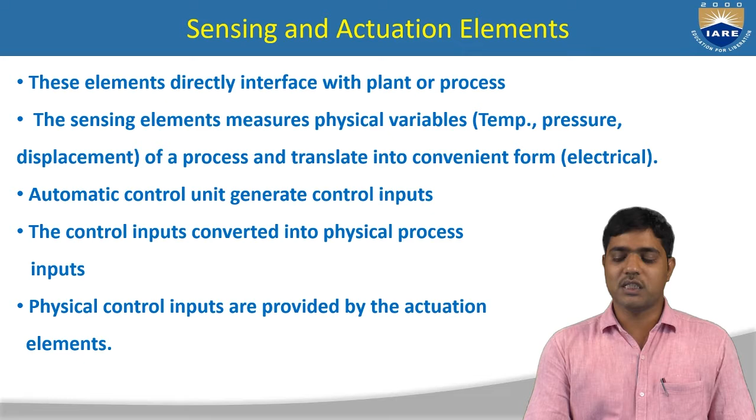If you look at the typical sensor system, these sensors are composed of a set of typical functional elements, connected in a specified way to provide a signal in the necessary form. In this typical sensor system, you have the medium, sensing element, signal conditioning element, signal processing element, and signal handling element. So what do you mean by a medium? Medium means it is a physical process where some phenomenon takes place.

Suppose you take a boiler; there you observe what pressure or temperature takes place because of some chemical reaction or any other reactions. So there may be a change in the physical variables within the process or plant. That is what we call the medium. Now these sensing elements sense this particular physical phenomenon.

So because of the physical phenomena, there may be a change in the physical variables, like if we are taking the temperature. So because of some physical phenomena, there will be an increase or decrease in the temperature. That particular temperature you are going to sense through the sensing elements. So here these sensing elements are going to interact with the physical medium, either directly or indirectly.

Suppose we take the example of thermocouples. So what is the principle of thermocouples? If you are going to measure the temperature with the help of thermocouples, one side of the junction points interacts with the medium directly, and on the other side there will be a change in the voltage. Because of the heat changing at the junction, because of the medium's physical phenomena, there will be a change in the voltage at the other end of the thermocouple. So the thermocouples directly interact with the medium.

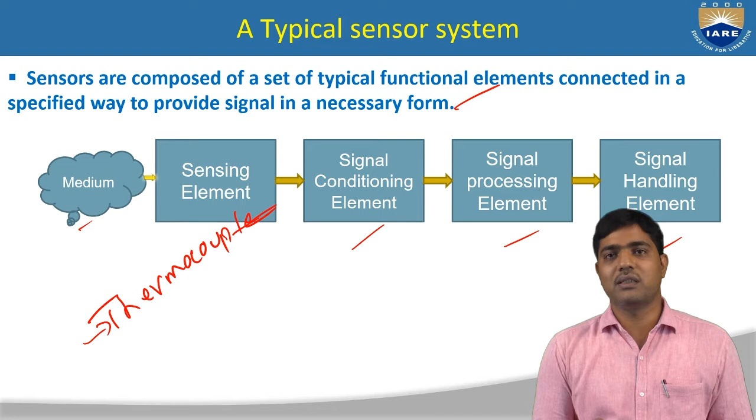On the other side, take the optical pyrometers, the second type. So what are optical pyrometers? These also sense the temperature change. How do they sense the temperature? They detect the change in color. If it is very much heated, you can see a huge amount of red color, and based on the color variations according to the change in temperature, that color variation is sensed indirectly through the optical pyrometer, and based on that color sensing we can measure the temperature of the process.

So thermocouples directly interact with the medium, while optical pyrometers do not directly interact with the medium, but still they measure the changes in temperature by indirectly sensing the change in color. So this is about the sensing elements. Here you are going to sense the variations that take place in the medium.

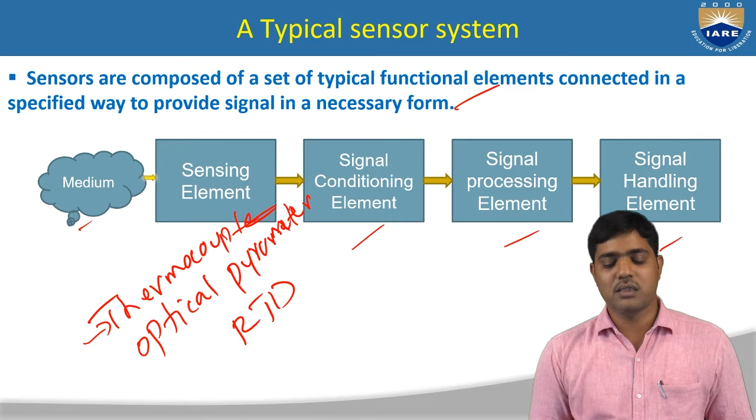Now if you take a variety of sensors, the output may vary. If you take thermocouples, what kind of output do you get? You get a change in the voltage. But if you take RTDs, that is resistance thermo detectors, for the measurement of temperature, what output do you get? You get a change in the resistance. Sometimes you may get electrical variables like voltage and current directly, or sometimes you get a change in the resistance.

Then you have to convert this change in resistance to some electrical signal. That is possible with the signal conditioning element. Whatever variable you sense can be fed to the signal conditioning element. When you use the RTD, the output will be a change in the resistance. If you connect this resistance in any one of the arms of a Wheatstone bridge, because of the change in resistance there will be a deflection in the Wheatstone bridge. That deflection you are going to measure.

So you keep this change in resistance, or RTD, in any one arm of the Wheatstone bridge. Like that you directly get the output in the form of an electrical signal. It may be voltage or current. Then you have the signal processing element.

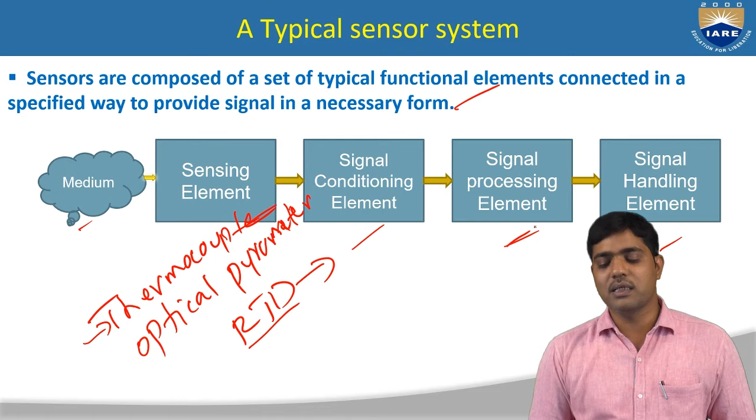So in the signal processing element you are going to perform various activities. You may filter. What is the need of filtering? To eliminate the noise. If there is any noise present in the measured signals, you have to alter the signal properties and eliminate the noise present within the signal. That's why you perform the filtering.

Then diagnostics. What is the need of diagnostics here? If you want to know the health of the sensors, whether you are getting the data properly from the sensors or not, or whether the sensors are measuring within the given range or not, that kind of information is very necessary.

Why? Because if the sensors are not performing well, or not measuring the variables exactly, then whatever controller actions you take lead to deviation in the final product. If you are not able to measure the data through the sensors from the physical process, then even if you provide control actions to the plant, final product variations may take place. So diagnostics is also one of the important factors in the industrial sensor system.

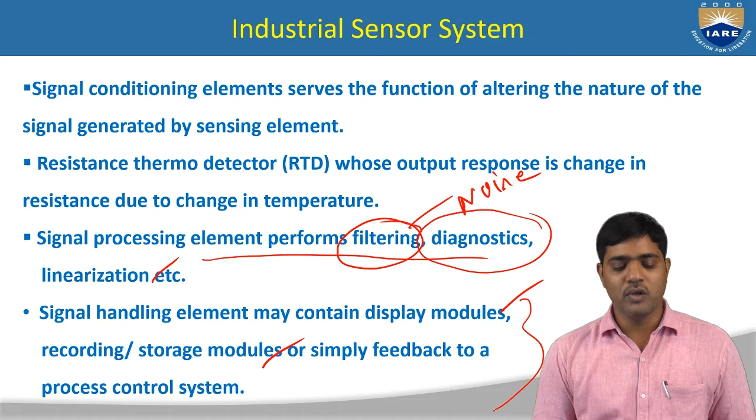Why? Because if there is a huge change in the temperature, or even though you provide the control inputs the plant is not reaching the settling time, then at the supervisory level you may have to take decisions, like changing the set point or changing the controller. So it is very useful to send the data from sensors to the supervisory control. And the signal handling element may contain display modules to display various values, recording and storage modules, or simply feedback to a process control system. These are the functions of the signal handling elements.

Coming to the second element, the industrial actuator systems. Suppose you measure data through the sensors from the physical medium; that is fed to the controllers. Depending upon the set point and the input from the sensors, the controller generates control inputs. This control input has to drive some actuators. Suppose you are going to control the flow of a process: this is the pipe and here you have a valve. Now you have to control the flow in this pipe.

Now we have the control input here. This control input may not drive the control valve directly. Why? Because the control input may be in the form of an electrical signal, and that electrical signal may not drive the actuators, which may be pneumatic or hydraulic. So we have to convert this control input into motion, and that motion rotates the valve, which increases or decreases the flow within the pipe.

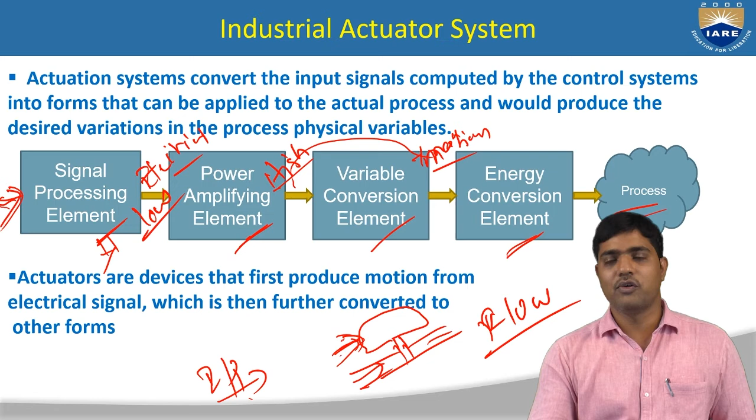In the next level, we have the industrial control system. This is the heart of any industrial automation system, because if you want to control any process variable, you compulsorily require controllers. In the industrial automation pyramid, this is at level 1. So what is the functioning of controllers?

So all the time, if you have given some set point, the controllers are going to continuously generate whatever controller input is needed to maintain the output equivalent to the desired input. So whatever command signal you have given, the controller's duty is always to track this input and output signal. If there is any deviation between the command input and the output, you have to make the necessary actions with the help of the controller. If the controller is not able to perform well, you may have to change the controller, or add some tuning techniques. So there is a lot that can be done with the controller part within industrial automation systems.

So what are controllers doing exactly? These are the elements that accept the command signal from the human operators or supervisory systems. Who sets this command reference or set point? Either the human operators or the supervisory control system gives some command signal to the controllers, acting as a command reference or set point. And also you get data from the process through the sensors to the controllers.

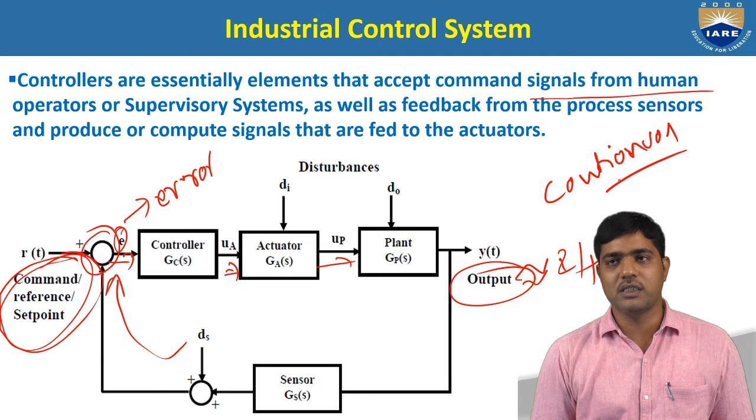And on the other side, you have sequence or discrete event control actions. Here, process variables are controlled at discrete intervals. Why? Because if you take binary systems, the logic will be 0 or 1 - 0 means low level, 1 means high level - so those are discrete values.

So instead of continuously controlling or tracking the output, here you measure the variables at discrete intervals. For these controllers, you may have on-off control, or high, medium or low level control.

So how do we sense these discrete variables? By using limit switches, pressure switches, or photo switches, we measure the process physical variables at discrete instances.

How do we make the controller? Maybe with the help of programmable logic controllers - these are the best suited controllers for controlling the process at discrete intervals - along with industrial PCs and dedicated processor based controllers.

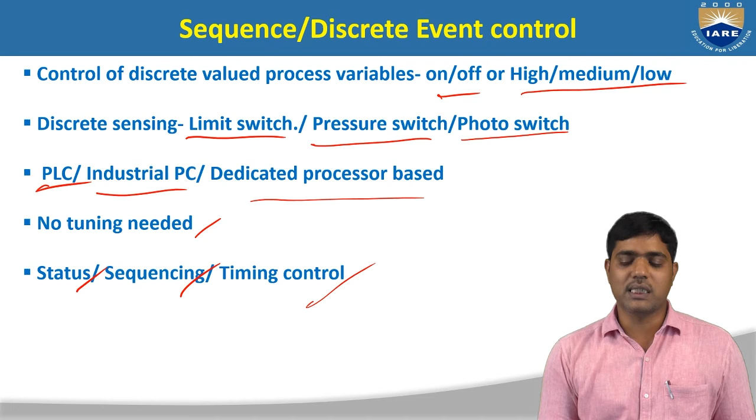So when you design such controllers for any process control, it does not require any tuning, as it is required in case of continuous control systems. So until and unless you change the logic, it does not require any tuning. Here you may get the status, sequencing, or timing control. So this is about the sequence or discrete event control.

The second and last one is supervisory control. What is the functioning of supervisory control? In supervisory control, there will be a human machine interface, HMI, where you get the display of all the control or physical variables at the supervisory unit.

Now, if you want to change the set point of any controller - suppose my temperature set point is 50 degrees centigrade, and I want to increase the temperature within the boiler to 100 degrees centigrade - how can I change the set point from 50 to 100 degrees? Here you have to give the command input from the supervisory control to the controllers.

At the automatic control level, you may be having n number of control loops. All these control loops are monitored by the supervisory control, which provides the command inputs to all control loops present in the automatic control.

Here, set point computations show the impact on energy, quality, and also production volume. Suppose you have changed 50 to 100 degrees centigrade - if the settling time is very high, then you cannot save energy and cannot increase the production volume.

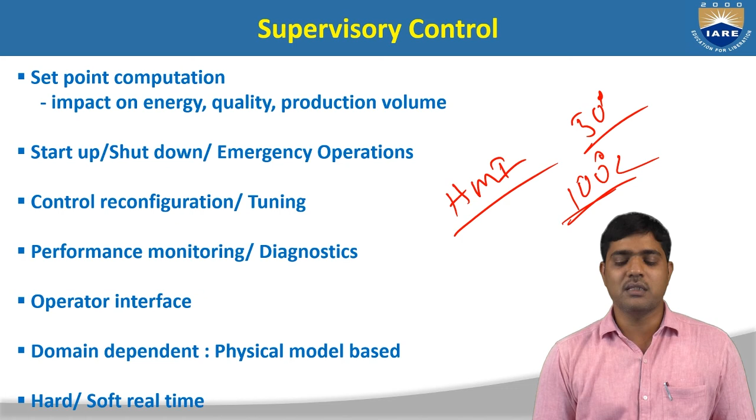And also at the supervisory control, you may take some decisions - if you want to start up the process, or shut down, and if there is any emergency operations, that can be performed at the supervisory control level.

And also control reconfiguration or tuning. So if the control is not performing well, then you may have to change the controller, or you may have to adopt new tuning techniques.

And performance monitoring and diagnostics. So if there is any deviation, or large deviations take place within the variables, then compulsorily you have to perform the diagnostics. Some part of the sensor data may be processed to the supervisory control, where you can perform monitoring of these physical variables and also perform diagnostics.

And operator interface - there will be a human machine interface or displays presented at the supervisory level, where the human operator can have picturized values of all these process variables. So this is domain dependent, physical model based, and you can work in hard or soft real time.

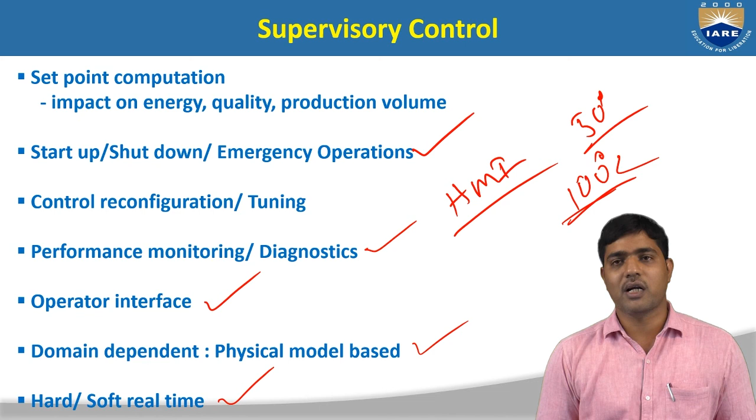So if you go to any supervisory control input, it is a combination of both hardware and software equipment. There you have some dedicated hardware equipment and also dedicated software at the supervisory level for controlling the industrial automation process.

And you have the production control - this is at level 3 of the industrial automation pyramid. Here you perform process scheduling and material handling, maintenance management, inventory management, quality management, resource optimization technology. At the production level, you may have a variety of tools to perform scheduling, maintenance, management, quality control and also optimization.

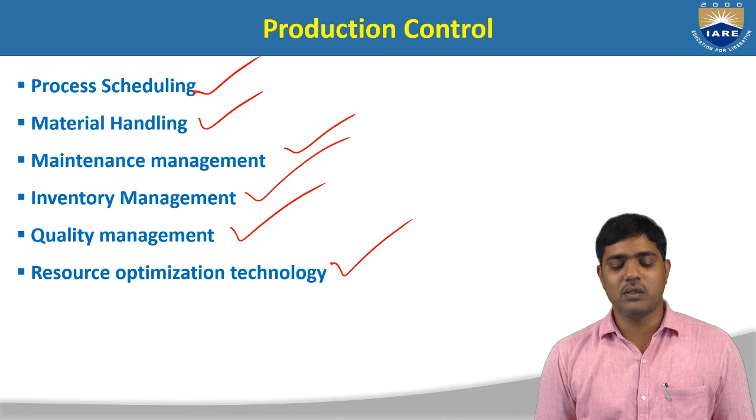So here you are going to run numerous tools that are specifically related to the kind of automation system you are going to use. Based on that, you are going to make changes in the supervisory control.

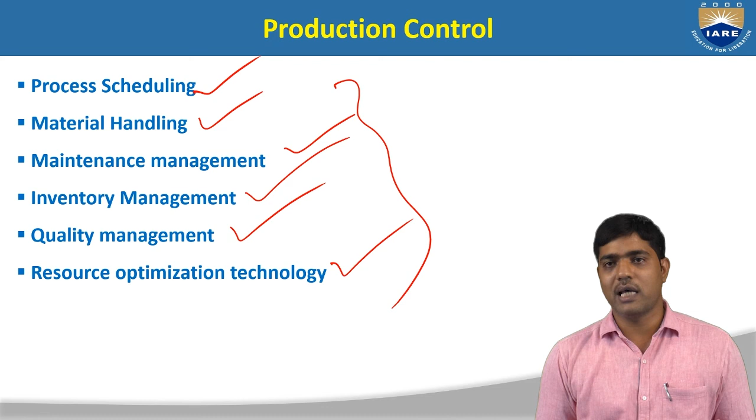And the last one is at level 4, where you control at the enterprise level, which is completely related to the business aspects. So these are the various elements of the industrial automation system.